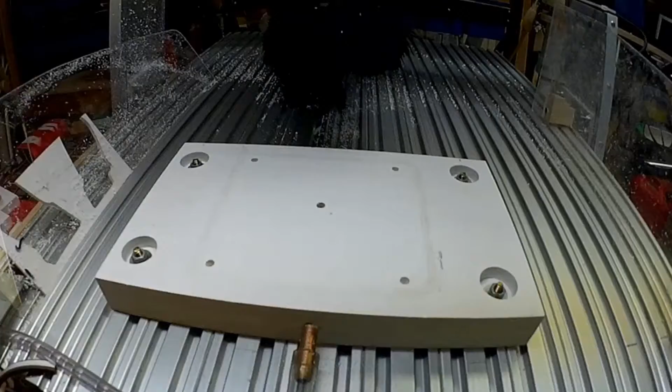Okay, some of the stuff that you need to know when you're doing this two-sided machining is you've got to have everything kind of orientated on the same axis and the same side. For instance, on my vacuum plate, I have my vacuum plate actually access to the center. If you look right here, that's where my vacuum hole is, and then I've got these four holes. These are indexing pins that I have for extra plates.

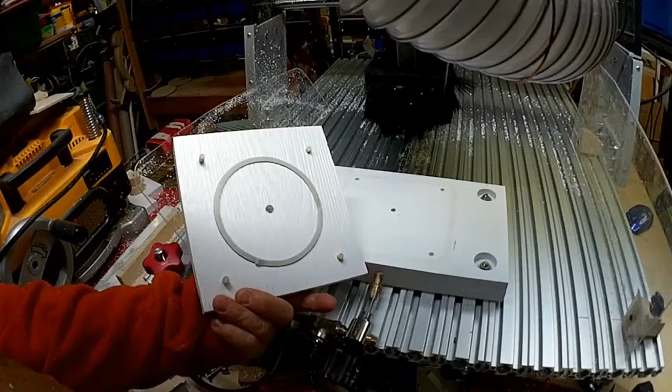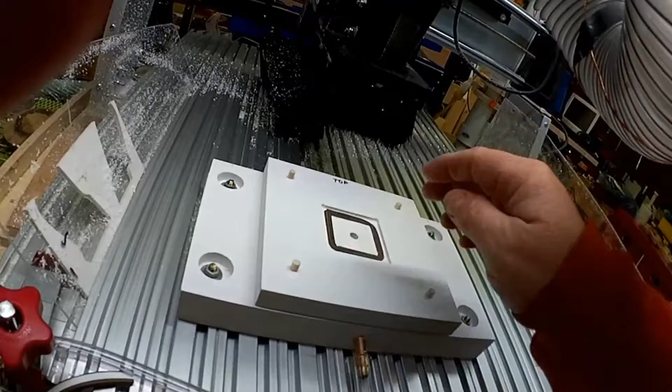And you'll see my indexing pins on this plate that I put up there for different projects or different things. In other words, this plate will index in the same place every time. I put the top on it, and then these pins go down in those holes, and now this plate is indexed exactly where it was when I originally drilled it. When I originally drilled it, I drilled through this plate into my vacuum clamp. That way these holes are exactly the same on the vacuum clamp and my adapter plate.

Now on this adapter plate I have a square, if you can see it there, that I am going to index the part from. So what I'll do is cut a square out on my CNC that fits exactly into this, and it will be centered on this plate. So whenever I flip the part for the second side, I always have to make sure it's orientated so that it's always on the same side.

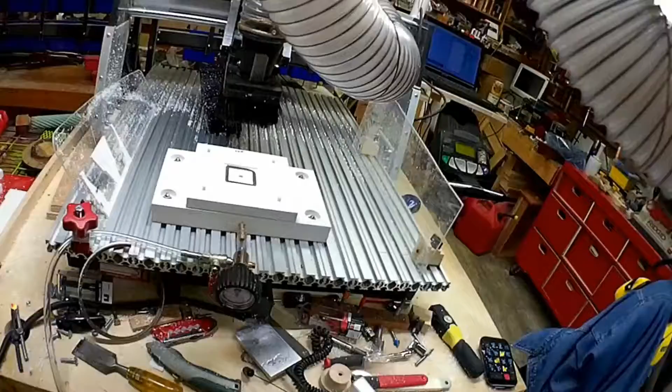In other words, if I have a block in here, I'll orientate the block like this. I will put a hash mark on the top to indicate where the top is, like up here. Then when the vacuum plate pulls it down, it's going to pull it down in the same place every time. So when I go to flip it, this edge is on the same edge, so the software knows exactly where this piece is going to be cut out from. When I flip it back to do this side now, it's always indexed exactly the same.

You want to make this a pretty tight fit, a pretty decent fit. Again, like I said, there's a couple different ways of indexing the block every time. You can put pins in it, like this block here, and I usually do that on a little bit larger stock, but when you've got stock that's maybe this size here, it's actually easier to make a square, and then I'll suck it down with the square.

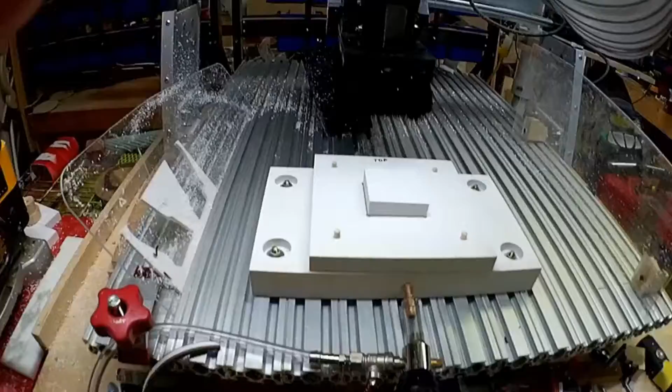Let me get the vacuum pump started, and you'll see what I mean. Right now I have no vacuum on this. I'll turn the vacuum valve on, and you can see that it pulled this right down in there. Okay, and it doesn't move, and this doesn't move. That's all pulled together real nice and tight. Right now I have about 19 inches of vacuum on it, and that's not going to go anywhere. It's going to be right there.

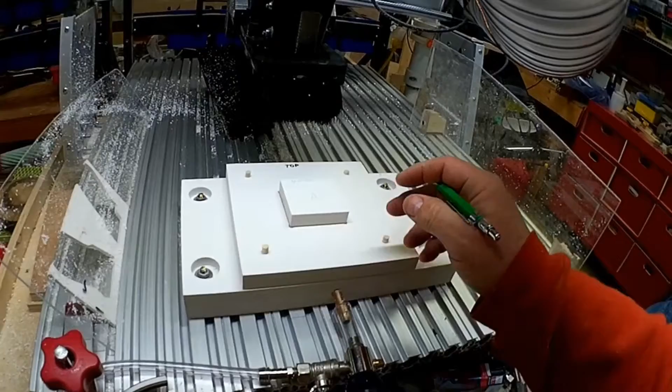So that's one of the secrets that you need to know when you're doing this: you always have to be using, for instance, this edge here all the time, and when you're setting it up in your software, you have to be mindful about that. In other words, this side, A side, would be a mirror image of B side, but you always have to be using the same edge as an indicator, and I always use the center as an indicator too. When I'm in the software, I indicate everything off this center with this edge as being the same.

A lot of times in the software, what I'll do on the outside is put a letter right here, so that when I flip it, I know which side is up, because the letter is going to be backwards when I flip it. So just a few things that you need to know.

Okay, we're using the Cut3D software. We're going to want to do this from the top. Okay. We are going to put it to scale to inches, which is going to change these numbers here. And we're going to do a top and a bottom. And then we're going to say apply and then go to next.

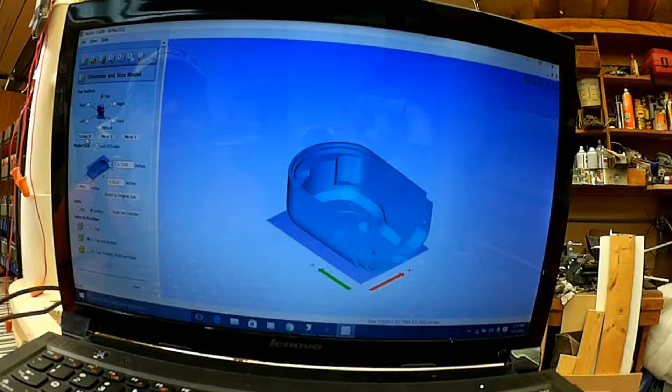See, our X direction's going this way. One of the things I want to do is attach the tab to the back, and I want this open to be Y in this direction. So what I have to do is rotate it, okay, until I get it in this direction. Then I apply it for top and bottom. Then I go to next.

Now here's where we're going to tell the software where we want our 0 to be and where we're going to touch off on and all that stuff. So we're going to want to touch off on the top, which is up in this corner here. Our original position is going to be X0, Y0, which we're going to do in the center, which it is right now, because we picked that as the material size up here.

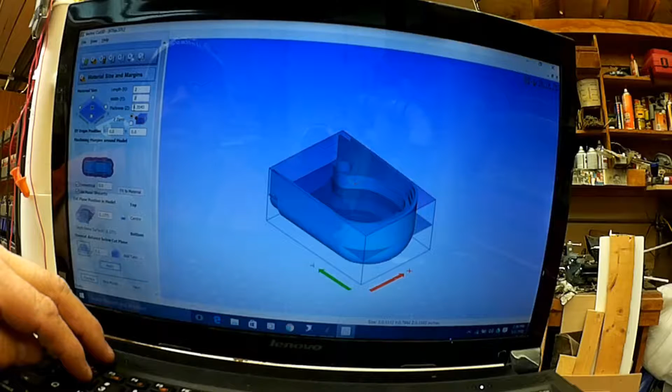Okay. You can make the material size anything you want. So let's just for giggles make ours 2 by 2. 2 by 2, and we're going to go 3/4. So we're doing it by 3/4.

Okay. We want it symmetrical, probably around the outside of it using the model silhouette, but I want to have enough room so my 1/8 inch bit can go down the side of it. So I'm going to make this 125, and that way I'll have enough room for the bit to come down the side of it. We want this to be in the center. Okay, so we want our center plane to be in the center of it, because when we rotate it, we still want to work off this center plane in order to get the depth right on the top and the bottom.

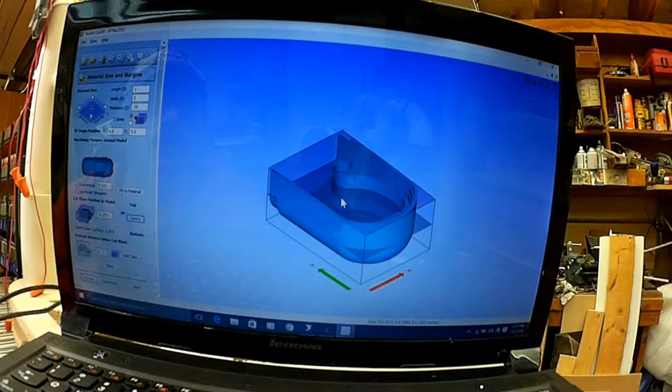Now, one thing about this particular thing is that we have this deep hole down here. Okay, now I can turn this around and you will see, because of where the center line is, it's not going to mill the hole all the way down to the bottom. So there's a couple ways you can do this. Sometimes what I'll do is I'll take this cursor over here and I'll draw it down to see where I have to be in order to get the bottom cleaned out.

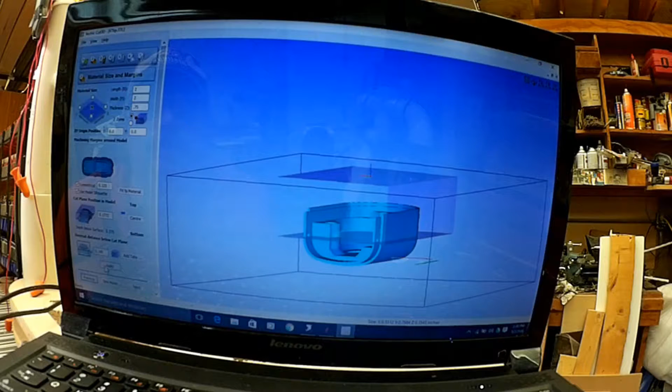Okay, and it says I have to be at 30.37. Recenter this, so I have to add to this 1772 to get 30.37. That's about 140 thousandths, so we're going to put 140 here. And what that's going to do is drop down the cut plane to where it goes down deep enough to get it cut on this side. Okay? And then we're going to say apply. Then we're going to go to next.

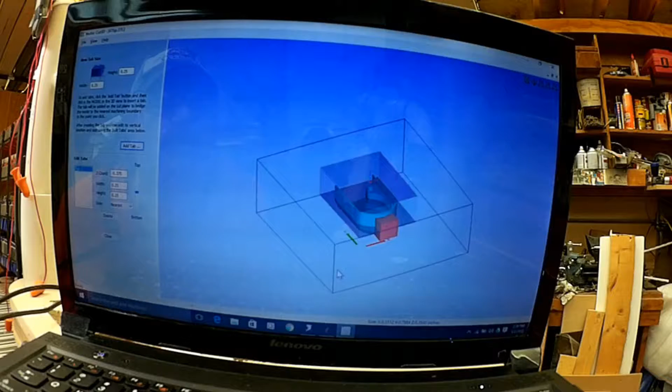Oh no, we're going to add tabs next. We want a tab on this end here to hold it. And I'm going to make my tab 1/4 by 1/4, that would be fine. Okay, we're going to add a tab. You will notice that it looks like this little dagger there. We're going to put that where we want the tab to be, which is right there. You'll notice it says that's where the tab is going to be, and if you look, it's pretty much on the center line. So we'll say close.

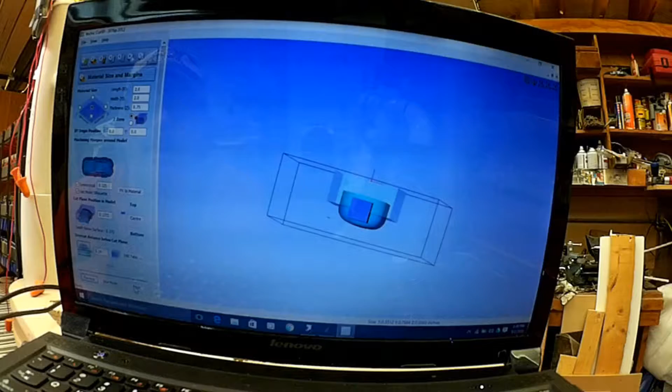So we got our tab, we've got our overcut distance, the cut plane position, and the model is positioned right in the middle. We're going to have 125 thousandths on the outside, and now we're ready to go to next. You will notice here that it says this is the roughing tool path. Now I'll tell you the honest to God truth, I'm going to rough and finish with the same ball nose because I don't want to do bit changes.

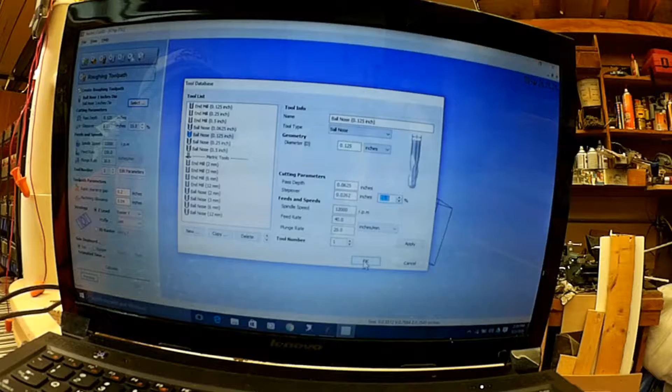Okay, so I'm going to go in here and select 1/8 inch ball nose, go up to maybe 20%. Feed rate and stuff is pretty good, and we're going to say OK for our tool, and it will put that tool information in here. It says it's tool number 1, rapid clearance. I usually go 200 thousandths over for rapid clearance for your Z level.

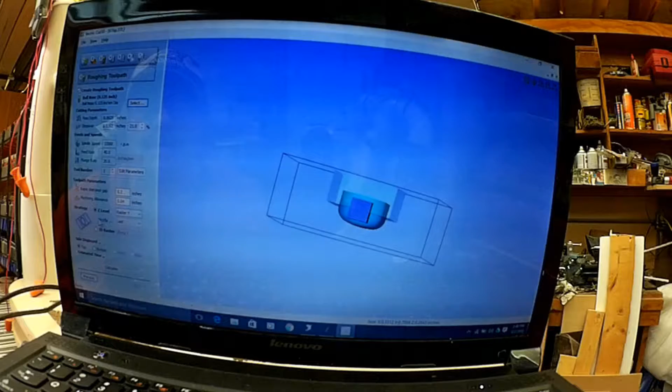Profile at the last. And you can raster this one way or the other. Being that it's longer in the Y direction than the X direction, I'm going to go in the Y direction. Okay? And then I'm going to say calculate. And you'll notice that it's got bottom and top. It says leaving large allowances, you can do stuff to your bit. Well, we're doing it in plastic, so I'm not really worried.

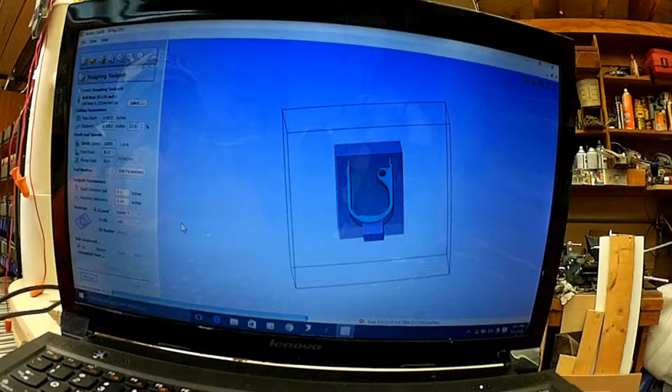And we're going to just wait for it to register itself. Okay, it says it's going to take about 7 minutes to do. Sometimes that's right, sometimes it's wrong.

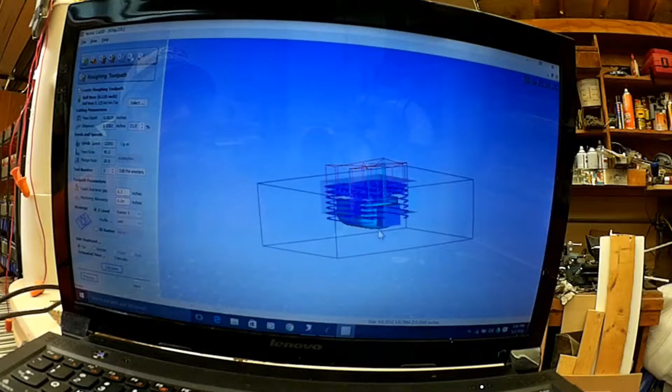You notice that we have the top calculated here, and it does go all the way down to the bottom like we wanted, so it should clean it out. Okay, and then if we flip it over and look at the bottom side of it, it does the bottom real nice too. Okay, now we're ready to go to the finish toolpath.

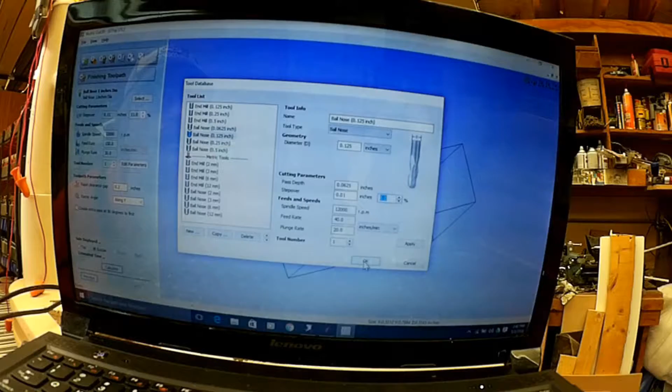Again, I'm going to select a 1/8 inch ball nose. This time I'm going to have the step over at a lower rate so it gives me a finer cut. I'll leave the pass step the same, and we'll say OK, and we'll leave everything else basically the same and make it calculate. This should go a little bit quicker because we're not hogging out as much material.

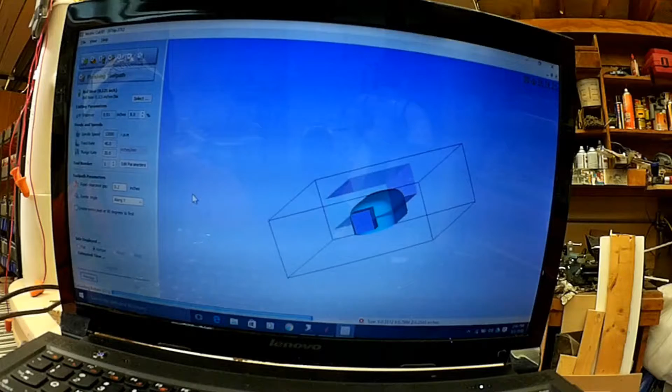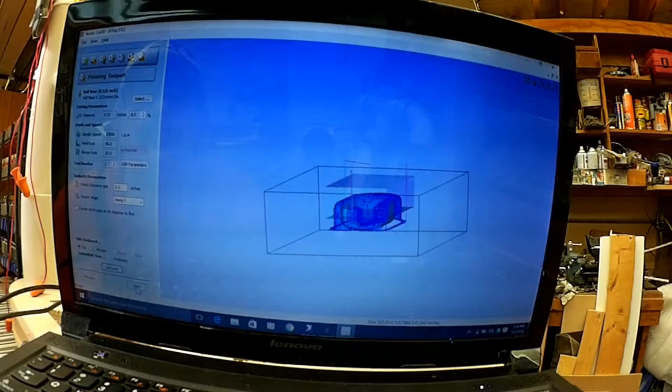And there's our finished toolpath there. And you will notice that the top and the bottom are both done. And it appears that it will go all the way down to where we need it to go. And that's about 4 minutes. The next thing we have is a cutout. We don't need a cutout toolpath for this. And now we can watch the animation.

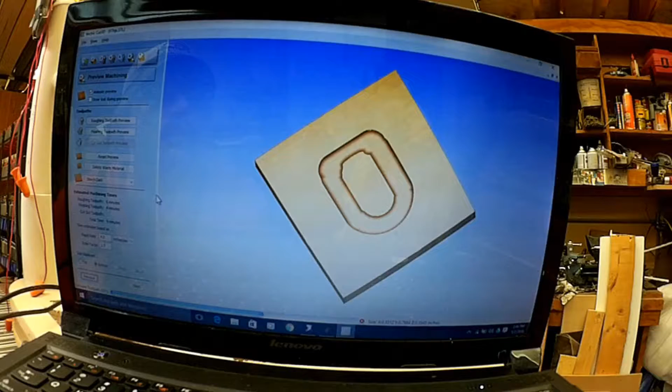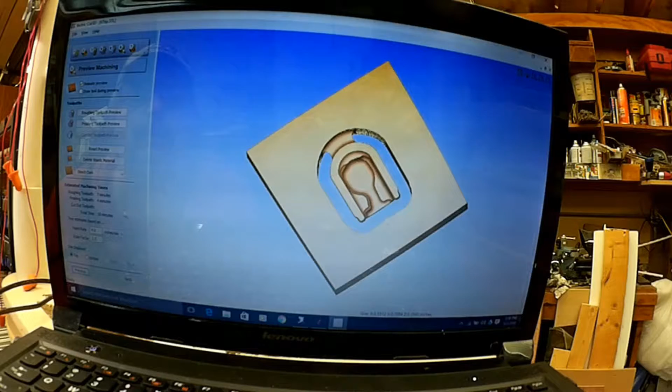There it is, all roughed in from the top. And this would be it all roughed in from the bottom. Okay, this is the rough cut of the bottom. And let's look what the finished toolpaths are going to look like. Well, here's your finished toolpath of your bottom. And here is the finished toolpath of your top. You'll notice that we still have this piece here, but that's what's holding everything in. And there's your piece in your 2-inch square block.

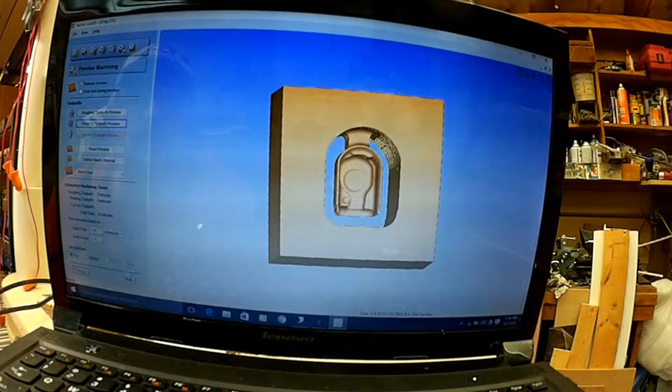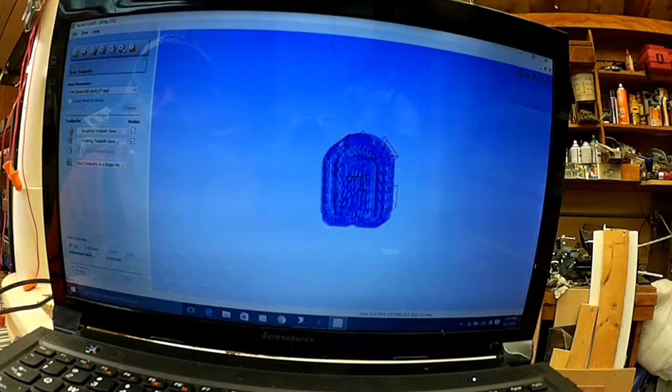Okay? Now the next thing that we need to do is go in and save the roughing toolpath and the finishing toolpath. I'm going to save them all to one file. That way the top and the bottom are each individual files. So the first one I'm doing is the top, and we're going to just save these to the desktop. We're going to put top on here and save that to the desktop, and then we'll come and do the bottom and do the same thing.

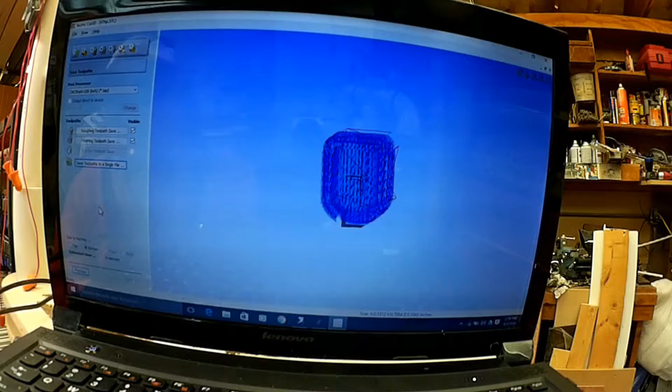Now when we look on our desktop, there's our two tap files. And at this point we should be done with our toolpaths. We'll minimize this, and then we will open up the control panel for the code. You're going to use the touch plate. We're going to use that to detect it. We'll load our code, and then we'll run the file.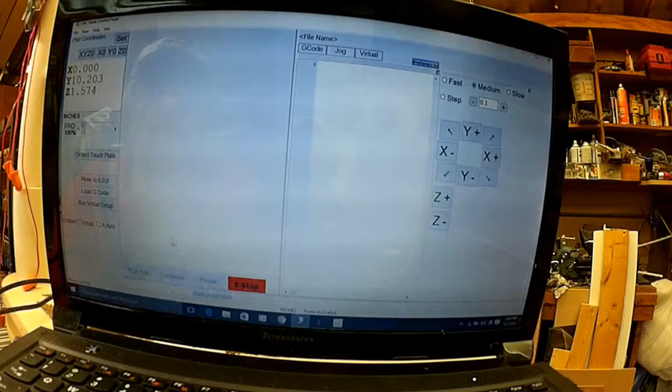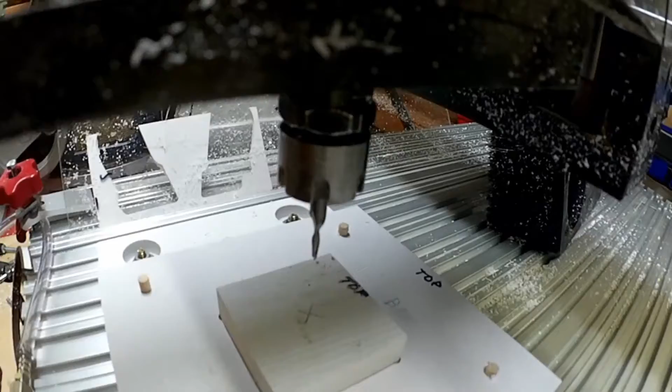Okay, we already touched off with the V-bit. I usually take a V-bit to touch off so I get absolutely in the center. As you can see, I've got it to where the top is at the top. I am centered in the middle because that's where my software has me being centered. And then I'm going to touch off at the top; my software is telling me that I'm touching off in the top.

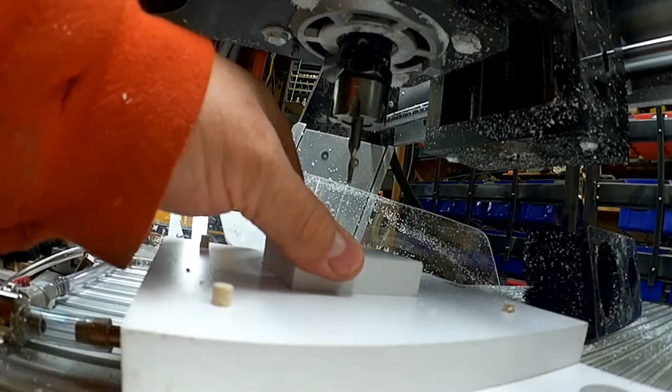So everything is up, the vacuum is up, so I'm about ready to do my touch off on the top of this and let it do its thing. So I'm loading the software. Okay, I'm going to detect. We're ready to detect the touch plate. So I've got it there, got the touch plate in place. I'm going to tell it to detect it. It now knows where the top of my thing is. I'm going to load the software.

Do the top first. And we should be ready to run.

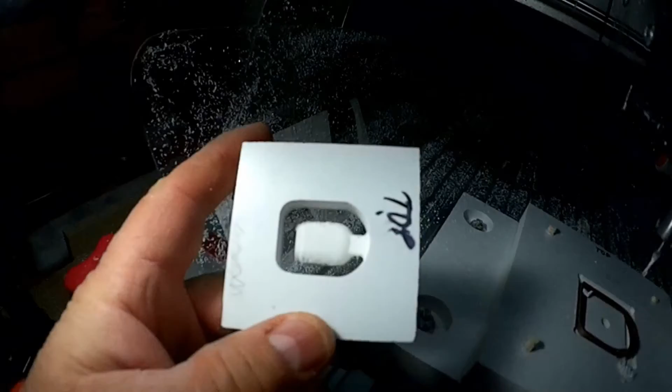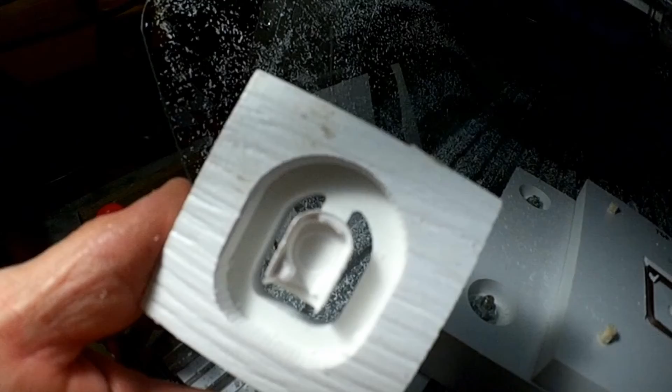Here's our completed part. All I got to do is cut that little piece off, and there you go.